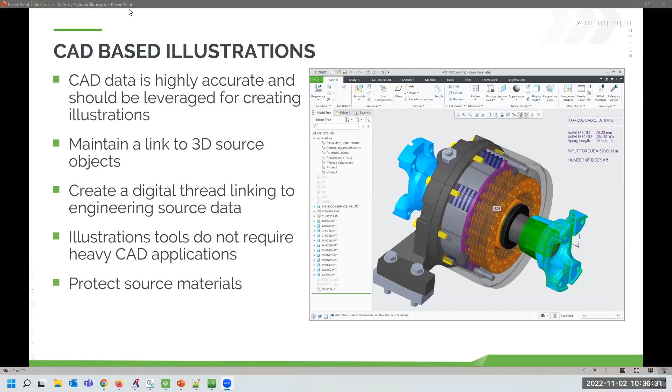The two PTC tools we have that accomplish these goals are Arbortext IsoDraw, which, as the name implies, is an isometric drawing tool with a full suite of electronic drawing capabilities for draw-from-scratch examples. I have this sample file—let's take a look at it. This was actually drawn using the tools in IsoDraw.

A unique capability of IsoDraw is that it can still bring in a 3D source CAD object. You would then flatten it into 2D and work with the additional drawing tools. So this is a long-standing tool—an excellent tool set that has seen quite a lot of use and continues to do so.

A newer illustration tool in the PTC portfolio is Creo Illustrate, intended as a three-dimensional environment for working with 3D source materials. In Creo Illustrate, you would start with a complete CAD model and work with it in an interactive 3D space, meaning you can also output three-dimensional viewables that could be used in things like augmented reality, or even creating an animation or a 3D viewable you might interact with on a screen—all possibilities using Creo Illustrate.

Between the two tools, they seem like they might overlap, and they do in what they can output for their end results, but fundamentally they really have two different use cases. IsoDraw has that full suite of 2D drawing tools and is limited to only two-dimensional output—at its core, it's a 2D drawing tool. Creo Illustrate can also output two-dimensional graphics, but it is more closely tied to that CAD-based source.

In Creo Illustrate, I can only consume 3D geometry—I cannot author 3D geometry. It's intended as being downstream from the authoring perspective of the 3D. I'm leveraging that data, but I can still do functions like, in this sample here, create my exploded view.

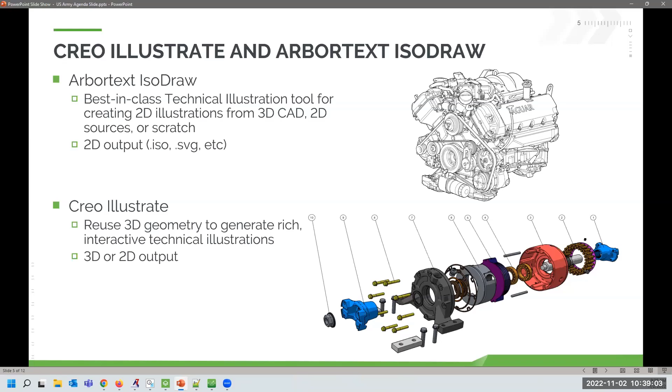So the top graphic is created in IsoDraw, the bottom graphic was created in Creo Illustrate. They can overlap in their outputs, but their use cases might be different depending on whether you need to open up existing 2D artwork and make changes—IsoDraw would be a great tool set—or if you have 3D CAD, Creo Illustrate is a really friendly program to use.

A couple points here, and I'll show a little bit around this: both of these tools are fully integrated within Windchill, meaning I can control all of the sources of my illustrations and the outputs of where my illustrations might be used, whether that's in, say, XML documentation or something like a parts catalog view that Ryan will show. I have controllability over all of those contexts.

I like to call them control points—you have control points from the downstream perspective of the illustrator, or even who might be downstream from there, say the parts catalog using an illustration, all the way back through to the CAD. So as changes are made, we are doing check-ins and check-outs, and everything is version controlled, stored in Windchill. We will see this type of interaction in Ryan's demonstration.

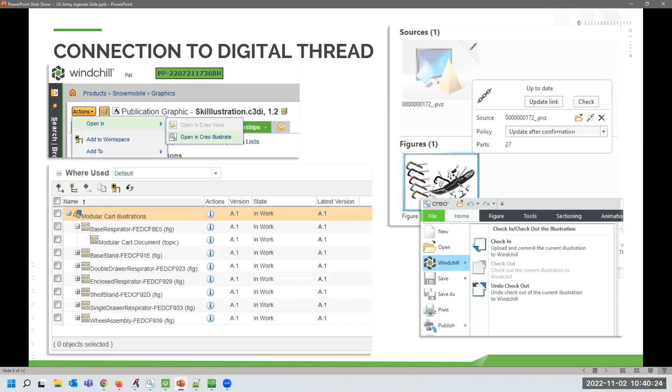So what I wanted to focus on was just an introduction to the tools themselves. But if you have questions here, please feel free to ask. This is a topic of interest that we could certainly schedule another session on and spend more time. I will end my presentation with the file formats that can go into and out of the illustration tools. If you would like these slides, please let us know and we'd be happy to provide them.

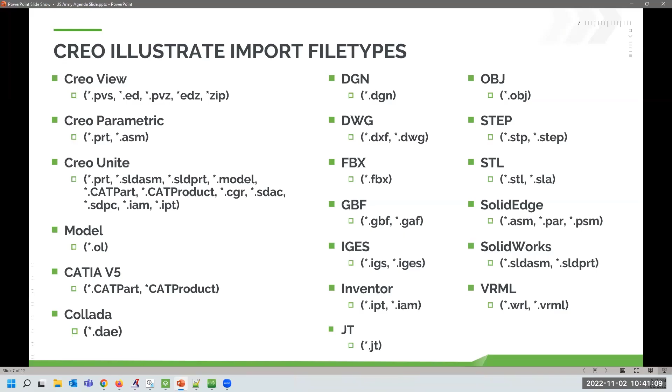For Creo Illustrate, it is able to import 3D geometry, so all of these formats here are 3D formats. Some of the PTC flavors, for instance the Creo View formats—we also have adapters that can go from formats not on the list to PVZ, which can be read into Creo Illustrate. So you could think of that being extended, but these are all the direct file types that can be read directly into Creo Illustrate, and links can be maintained to them, so if they're updated in the future, you can update them appropriately in Creo Illustrate.

On the way out of Creo Illustrate for publishing, we can publish to 3D formats, 2D vector artwork, image formats, movie formats, as well as capture procedural information for Vuforia. I'll do a quick example for what bringing in an illustration into Vuforia could look like, but there is a streamlined process for doing that on the Creo Illustrate export.

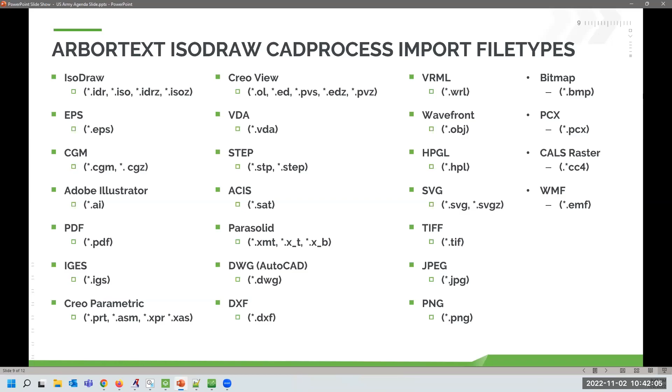For IsoDraw, IsoDraw can bring in 3D formats, 2D vector, and 2D raster. So that's what you're seeing here on this list. That is a lot of different file types. It's the only program I'm aware of that can do that. But some of the big ones would be things like CGM graphics and other existing 2D artwork we can open and work with inside of IsoDraw.

On the output of IsoDraw, it would only be the 2D formats, whether 2D vector or 2D raster. These are controllable through ISO profiles, or if you have a specific format, say for CGM for deliverables, IsoDraw has a large library of capabilities there.

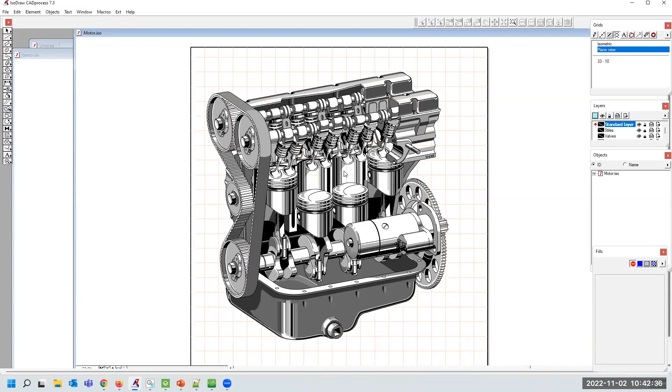So I'll start with IsoDraw and give a little tour here. This is that sample file I was mentioning that was actually hand drawn here in IsoDraw. We can see here that I have my different layers and authoring tools that I can have.

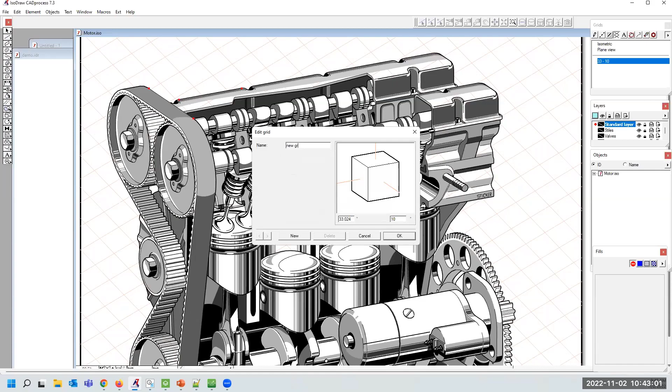The idea here is also that if I come in and let's say I grab a couple lines, we can make a new grid that will actually - let me make a new name. We can put this into a perspective that allows me to draw in the orientation of this artwork. So there's also tools for transforming from one perspective to the other, but you'll notice my camera is going to stay fixed to my workpiece.

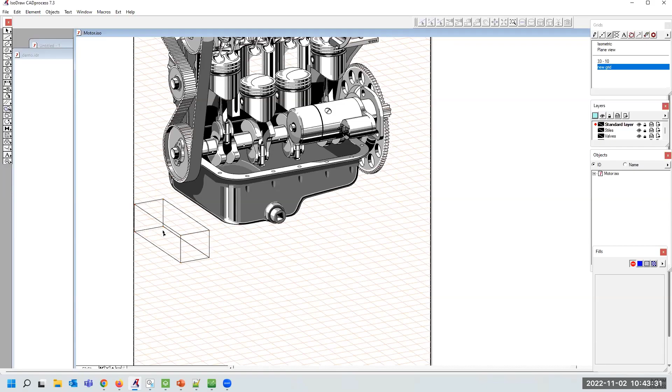Now that I've aligned my grid, I could come in and draw in the same perspective that I'm seeing here. So for instance, if I wanted to extend out this into a 3D shape, I can come in and do that. And then I would have the abilities to come in and trim up my lines, for instance, work with my fills and draw shapes and lines and other tools.

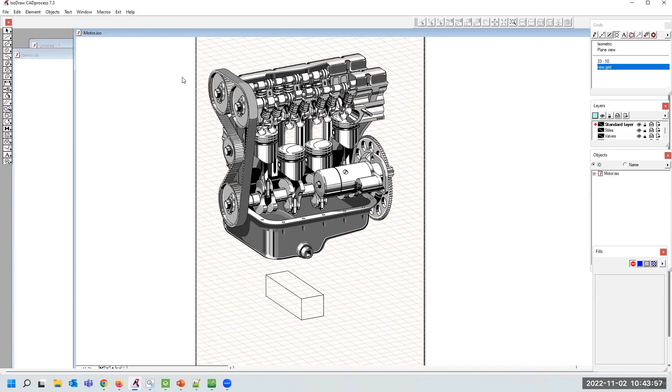So this is, again, just drawing type of functionality that I have here in IsoDraw. It's a really nice set of tools. There's perspective tools for laying out. Things like threads can easily be drawn, parallel lines, those types of things.

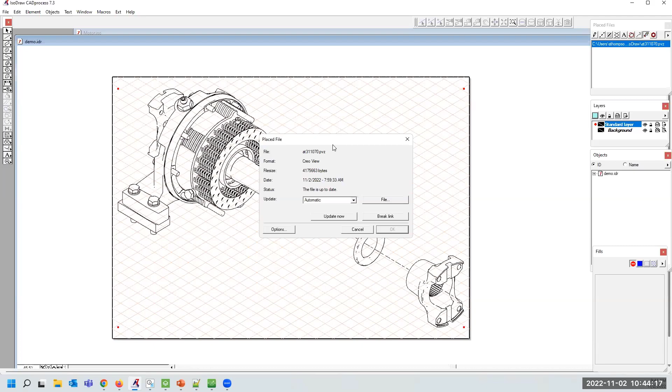A really cool capability is I can also have my illustration be linked to a source 3D geometry. So right here, this is a .pvz file. That's PTC's lightweight 3D format, the Creo View format. And right now it is looking for an update to the 3D data for my 2D artwork.

In fact, if I want to, I can actually bring this into the 3D. And when I do this, you'll notice my 2D tools are grayed out, and that's because I'm in the 3D edit mode. But I can grab on this part. I could change the color, for instance, if I wanted to. I can turn the parts on or off like I could with a layer.

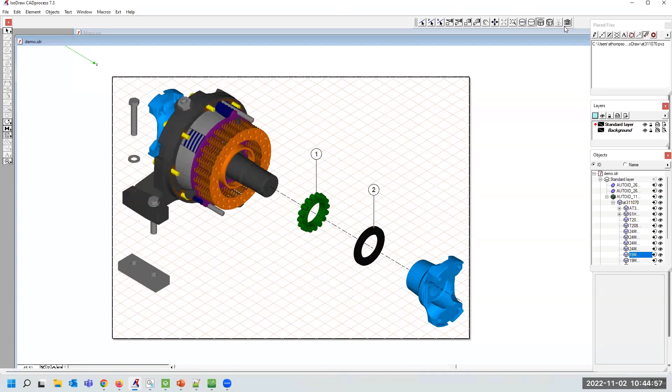But let's say I wanted to do some more exploding of these parts. I can grab them, we can do the explosion. And then I can convert this back into 2D artwork to use the rest of my drawing tools. In that process, I can choose how I would like it to draw the lines and convert the 3D into the 2D.

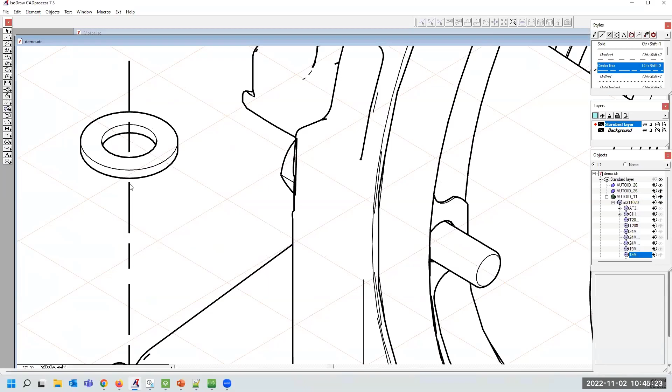Once back in the 2D perspective, I could then use the drawing tools here in IsoDraw. So in this tool, for instance, if I wanted to draw an explode line, I would draw the line, and then I can come in and we could do some trimming, for instance, to make that appear like it is going through the 3D geometry. So now I'm back in my line drawing mode, which would allow me to come in and clean that up.

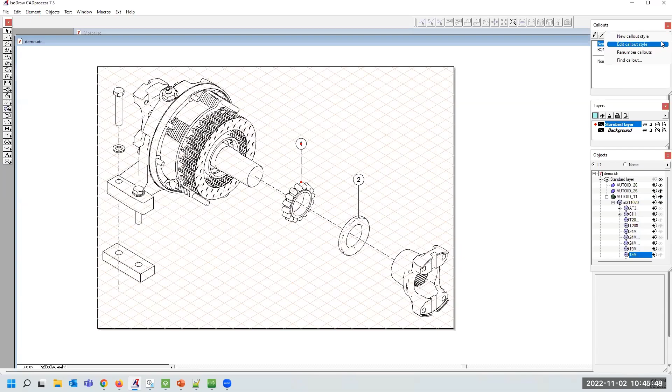So that's kind of a very quick tour here through IsoDraw. There are a ton of capabilities. Things like my balloons here are all controllable through editing. Text is a huge component here. I can create hotspot regions that would be selectable, meaning the text from this number 1 could highlight on my pick list in my graphic renderer. But here in IsoDraw, it gives me all of those capabilities for authoring.

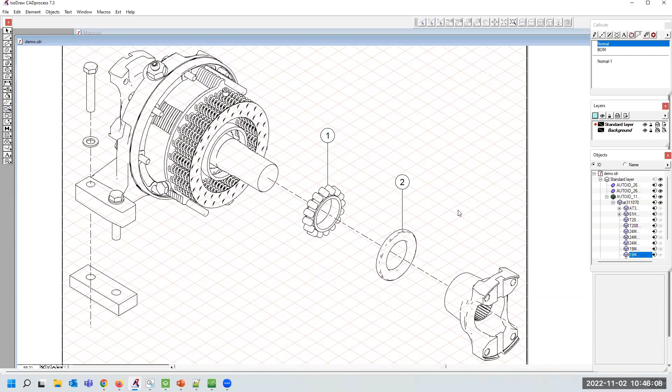Moving over to Creo Illustrate, so here is actually the same source geometry. This is the same parking brake assembly, but now I'm looking at this in Creo Illustrate. So I'm in the 3-dimensional environment working with the 3D model. And in Creo Illustrate, I have the idea of creating multiple figures or individual illustrations. The Creo Illustrate project file itself would be this .c3di file.

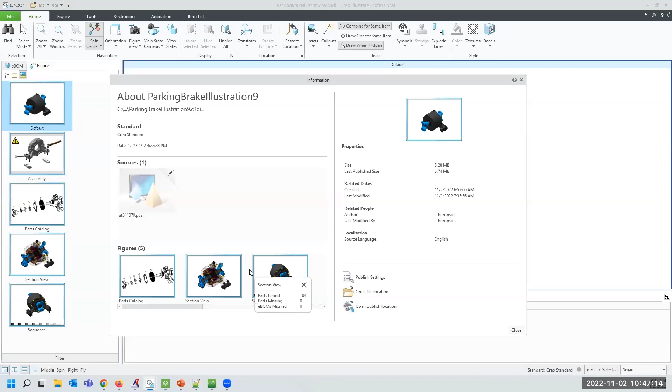It would contain, or can contain, as many number of figures or illustrations as you would like. It also, just like in IsoDraw, would contain the link to update the source geometry, and I can bring in multiple models in both tools. So if I wanted to bring in tooling or fixtures or even just other 3D reference geometry, you'll see in an example I have some tools, but you can load in other objects here. Based on that, I can have any number of figures that could be created, and the figures might be things like an animation, which I'll show here in just a second.

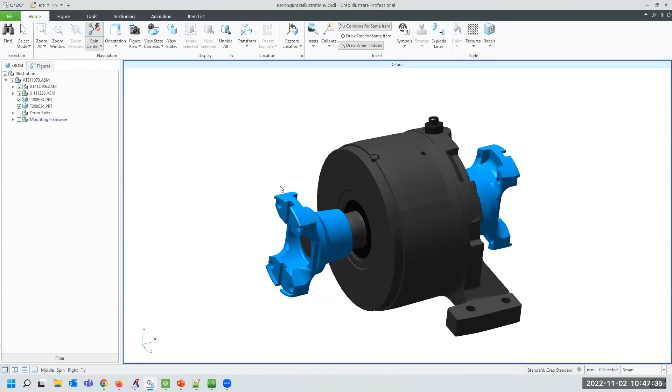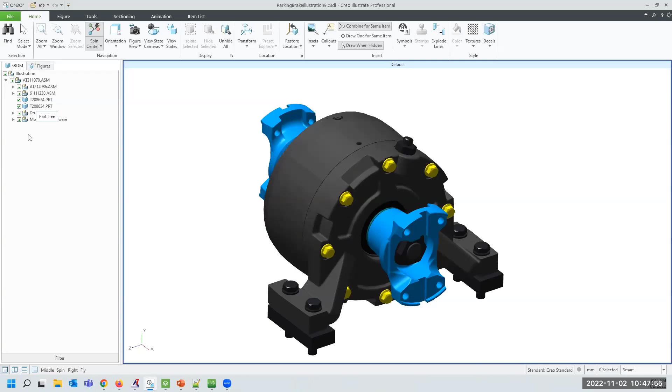So in Creo Illustrate, we can work with the structure of these parts, and I can actually restructure them. I made a couple assemblies here for myself to easily turn on and off some of the hardware and bolts, and make changes here. These changes are not being propagated to the CAD in any way, they're just changes in my illustration bill of material. But that's really handy, especially if you're working with a large assembly, or you might not be familiar with the engineering part names.

I can have access to rearrange that for myself as an illustrator. Speaking of the 3D information, all of the CAD attributes can become available here in Creo Illustrate. We can create parametric annotations that would look at this data. Say if I wanted a field for the material, if I wanted to have a callout, pull that off, or a torque value, all of that can come from the source 3D geometry.

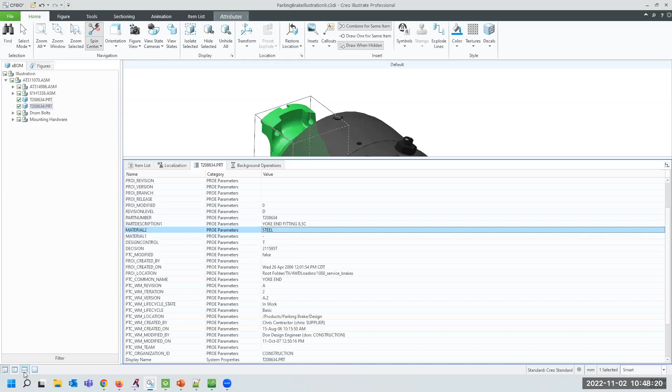The position or home position of all of these parts is remembered and also editable here in Creo Illustrate. So if I wanted to start making my exploded view, I can pull my parts out, and these parts are going to remember where they live. So I can tell it to go back to its home.

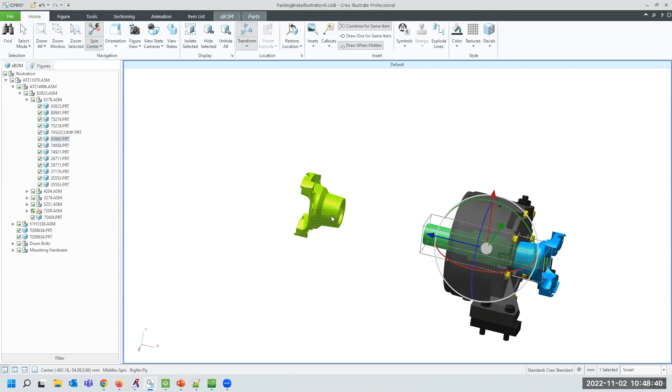Doing something like creating an explode line here is much simpler because it will actually draw that in the 3D. And if I wanted to grab, let's say, the seal and bring that out as well, that's going to be within the 3D bounds of that part. So I'm actually creating content within the 3D world. This is a friendly tool to use, has lots of nice user features.

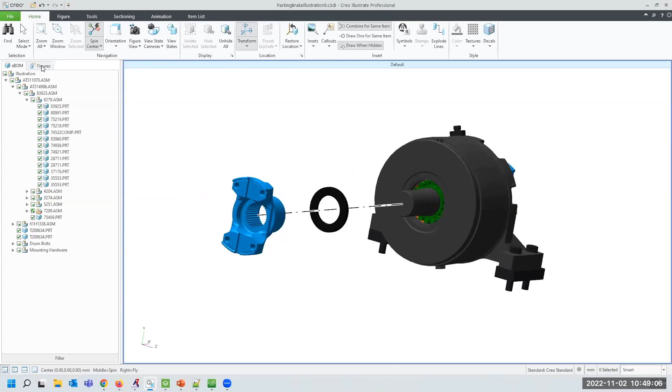Some examples we can do here in Creo Illustrate. Here is that example I was saying for, in this case, it's formatted for a page. I have a page size specified in case I'd like to output this in 2D and have it be controlled. But a couple examples here would be...

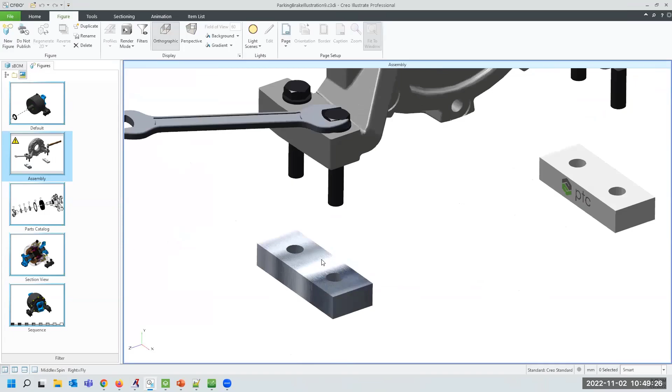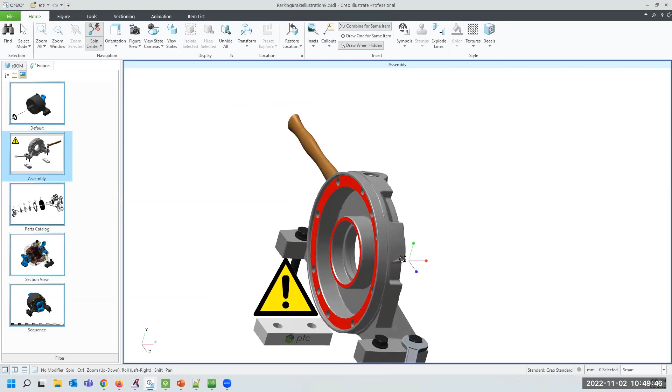We can have textures applied to parts. The colors of the parts are certainly editable as well. On the back face, let's say if we wanted to select on this face and change the color of that, I can quickly and easily do that. And change maybe that's reference geometry or something that I'd like to point out within my animation.

Here's an example of some of the tool library that is configurable here in Creo Illustrate. I have a logo applied to the 3D surface of the part. So some visual aspects here. One note, Creo Illustrate is not intended as a highly realistic rendering engine. We do have that as part of Creo Parametric. This, as the name implies, is for illustration purposes.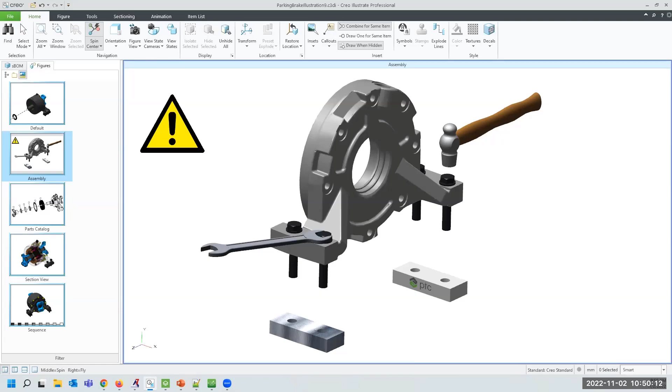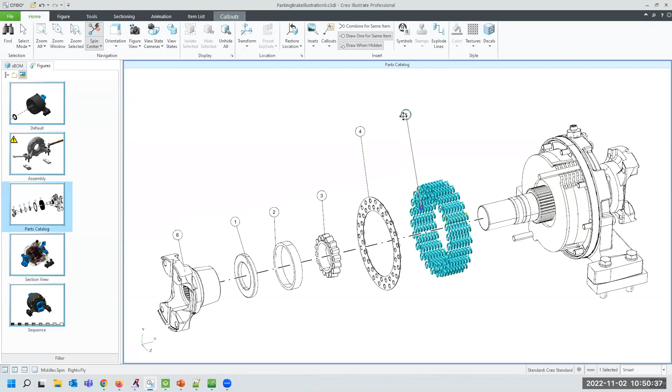A really common use case would be creating your parts catalog view. This is just a hidden line removed view, but you can see here, I'm still in the 3D geometry. So this might be something that I may export for 2D artwork, but I can have my callouts attached to the 3D geometry of these parts. So in my part viewer, I can select on the item and it would highlight, or the callout and it will highlight. And it's actually building an interactive list here in Creo Illustrate.

And in Ryan's portion, he'll show how we can control this list from the Windchill side and push the information into Creo Illustrate. But I can have this list, I could come into this list, and if I wanted to add that material value or torque spec or whatever other information might be at this part attribute level, I can have that populate here in Creo Illustrate as well.

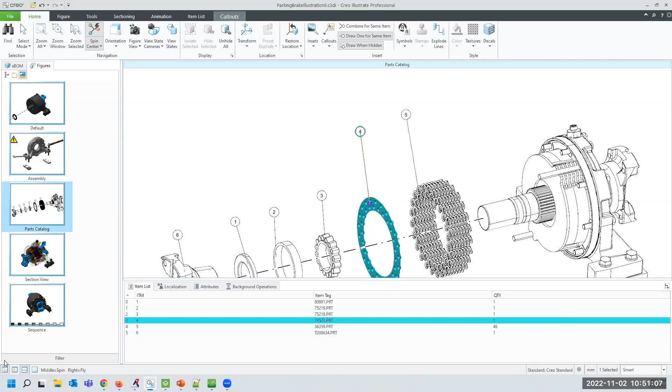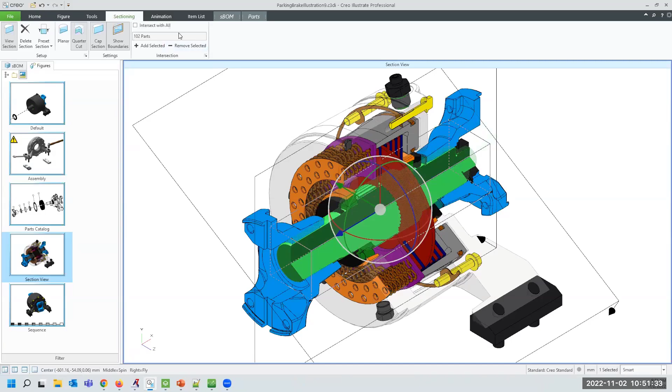A couple more examples. Doing something like a section view is really, really easy to do. I can simply say that I want a section view and then dynamically move it through the model. And in this case here, I'm having it intersect with, well, we can add everything to that, or I could remove items as I see fit for whatever I'm trying to detail or show. So again, just a friendly program to be able to use and come in. And of course, this can be exported in a 3D configuration so the end user can actually interact with and see the model in a 3D viewer as well.

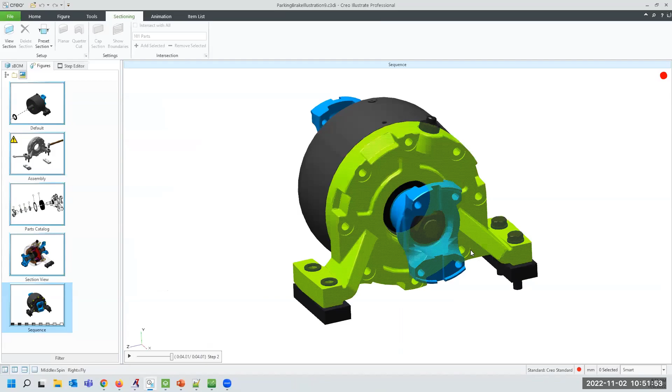One really powerful capability of Creo Illustrate is I can animate parts, and I can do that in what's called a sequence here in Creo Illustrate. This gives me stepped animations that build upon each other.

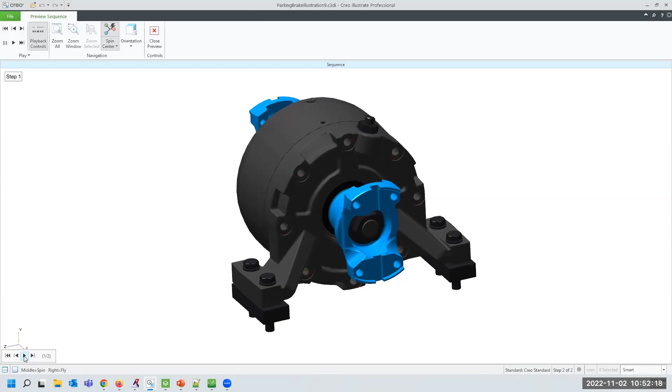So if we look at this in the renderer, we'll play through it. It's pretty simple, right? I'm showing some color changes, some parts unscrewing. So this could be a disassembly procedure. But the cool thing is that I've captured that in 3D space.

So if I want to play this back in whatever orientation, that can be remembered and then played back. That's the idea for delivering this to, say, augmented viewing, where it renders in 3D space and your camera position or eyewear position would then play that back. We can also capture the camera position in Creo Illustrate if we wanted to output a movie file as well.

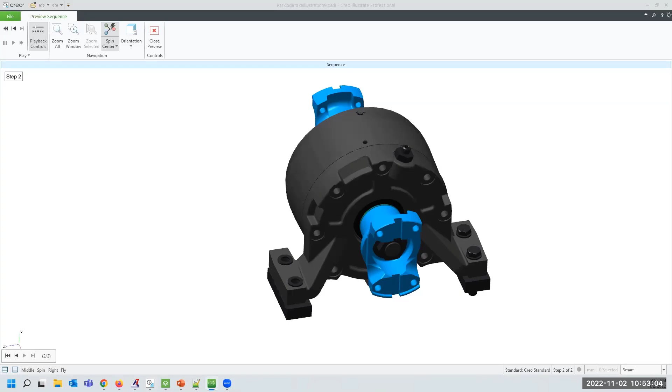So that's a quick view at some of the tools themselves. In terms of some examples for how these might be used, I have a couple. One is within an XML document, and this is just a quick example of showing multiple figures within a document.

All of these are going to be based on the same illustration file. You can see here this 16713 that contains all of these different graphics, and they can be interactive in 3D in the XML. This is a topic and a DITA topic, with tag types, but all of this is remembered, and the figures where these are used, the where-used nature is known when we store this inside of Windchill.

So we can have reusable illustrations. The source of those files from the CAD perspective is controllable, and even referencing them here in the XML, I might reference the 3D. So if this is published to a 3D environment, it could be interactive. If it's going to something like a PDF, it could be converted into an image during the publishing process as well.

So an example here would be this illustration file itself in Windchill, and we are looking at the upside-down where-used tree. I can see that it's used in each one of these figures and the location that figure is being used. So just to point out, all of this information is being stored.

I can see the synchronized versions, the latest versions, and changes made to this, and of course then I can see everywhere changing this illustration might affect.

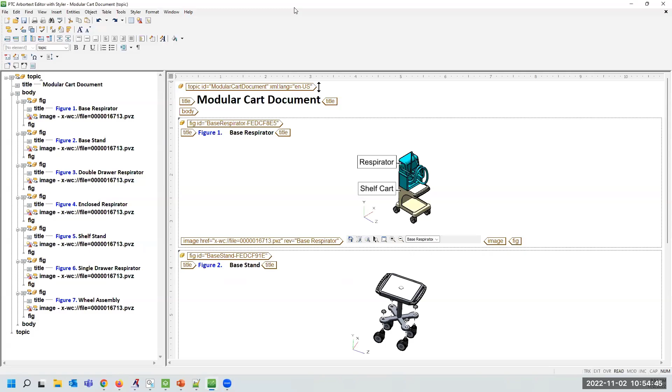My last example here would be going in and just a really simple example for building out an experience in Vuforia Studio. So this would be an augmented reality experience. Very simply, I can come in and upload my output from my illustration that we were just looking at. So here we now have my model in the 3D space.

Let's go ahead and I'll choose that sequence that I made. Then on my 2D overlay for my controls, let me make a button, and we'll call this the play button. Here in Vuforia, it's very simple to come in and interact things. So I'm dragging this onto the 3D model and saying that I want that play button to do a play function for that model.

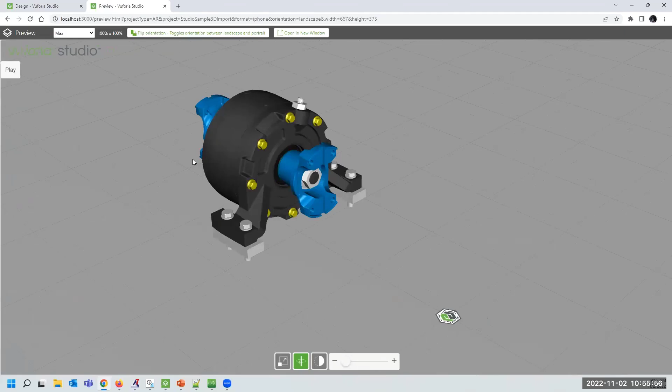If we do a preview here, so I've taken the output of Creo Illustrate and put it into an experience for viewing. So if we go and preview this, now I'm in the 3D world here, and in the real world, if I were to publish this, I could look at it on my iPad and I would be walking around the 3D space where this model is being loaded. But here's my little play button I created.

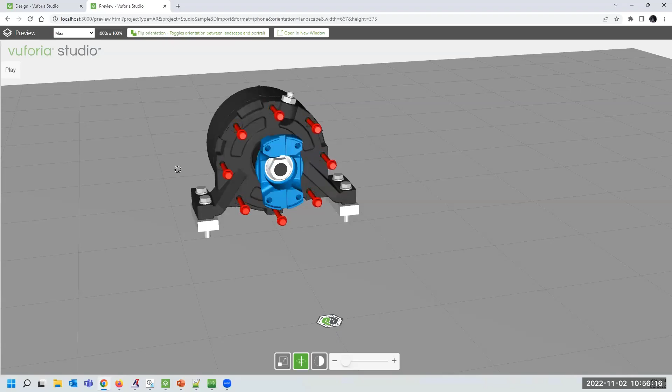And if I hit play on that, we'll see my animation and how I created that, right? So here's my bolts unscrewing, and then it will pause, and then I can come back and go on to my next step.

The really handy thing with these sequences is, let's say I forgot to do something in Creo Illustrate on the authoring side, I can come back and say, actually in step 1 at the very end, let's say we wanted maybe this part to change color. Well, I can come in and say let's do a color change, and let's have this turn, let's say yellow.

You'll notice here when I hit OK, it will propagate to all of my subsequent steps. So these are going to re-render. And then you can see here at the start of step 2, that's going to be yellow. It added to my little timeline here a color change event for this part.

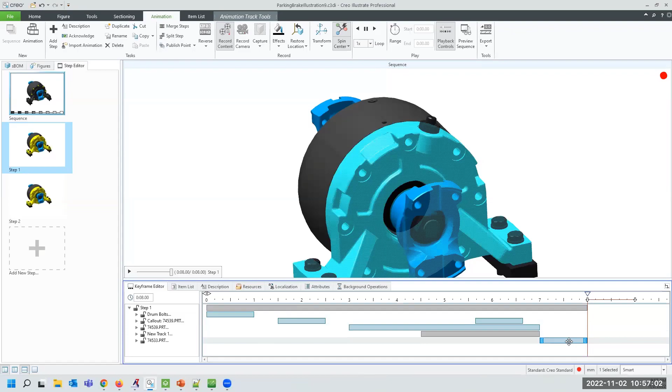So actually, if I wanted it to turn yellow in the middle of my animation, I can do that. And then as we play back, it will now turn yellow, along with my other animation. And then here in step 2, it will remain yellow. So this is really nice to use.

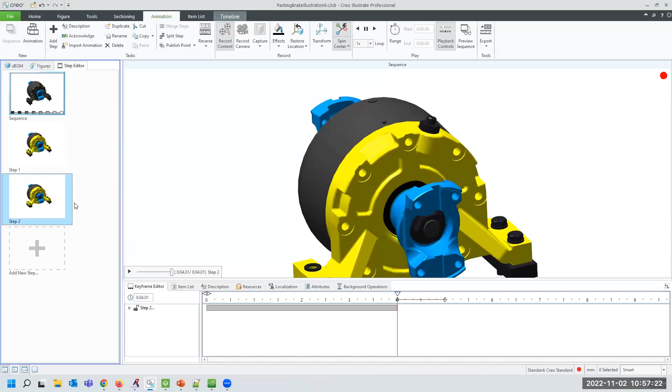I can rearrange these steps. If I forgot to do something or I need to add to it in the future, it's really handy to be able to come in and work with that in a sequential timeline.

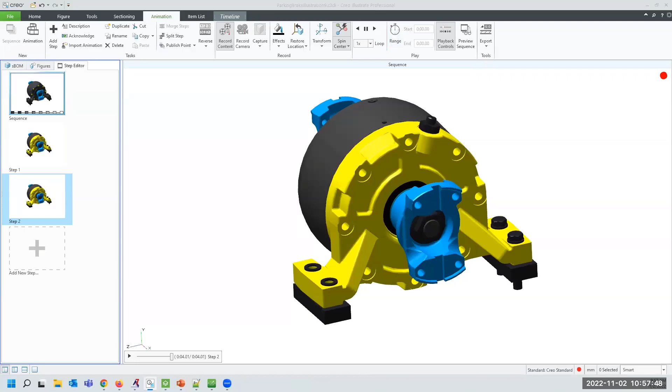So what I'll be demonstrating today is generating similar illustrations to what Scott just demonstrated, but doing that directly from a parts list in Windchill. I should also mention that just for the sake of time, I did pre-record this demo so there was no dead air, but let me go ahead and start this.

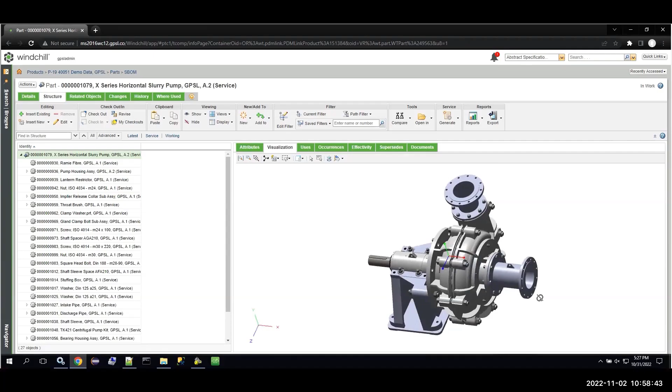So what we're looking at here is a parts list in Windchill. The first thing I'll show you is that this parts list is associated with a bill of material. In this case, it's a service bill of material. But a parts list could easily be associated with an engineering bill of material, logistics bill of material, any type of bill of material, and those bills of material can all be derived from one another—upstream, downstream bills of material.

So you can see that bill of material had some CAD data associated with it. Now going back to our parts list, all of the parts that we pulled in from that bill of material, you can see them in our parts list here, and each of those have an item number assigned to them automatically.

Now if we go and generate an illustration from our parts list, you can see the template we've selected is Creo Illustrate, so it will generate that C3DI file that Scott was just showing you in Creo Illustrate directly off of our parts list. I'll go ahead and give that C3DI file a name and click Finish. This can take several minutes in the background, but once it's done, it will allow you to open that up within Creo Illustrate directly from Windchill.

You can see on the left in our parts list, we also have that C3DI associated with our parts list structure. So now it's launched Creo Illustrate, and it's prompting us to log into Windchill from Creo Illustrate.

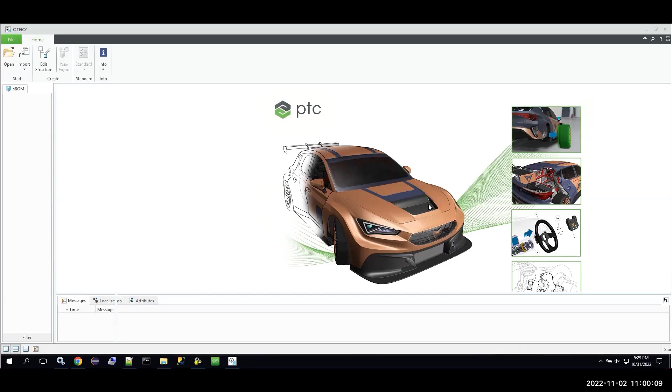From here, once it opens, you can see we have the basis of our illustration, so we can go ahead and start building out our figures. First thing I'll do is create a new figure. Like Scott mentioned, you can have multiple figures within the same C3DI file.

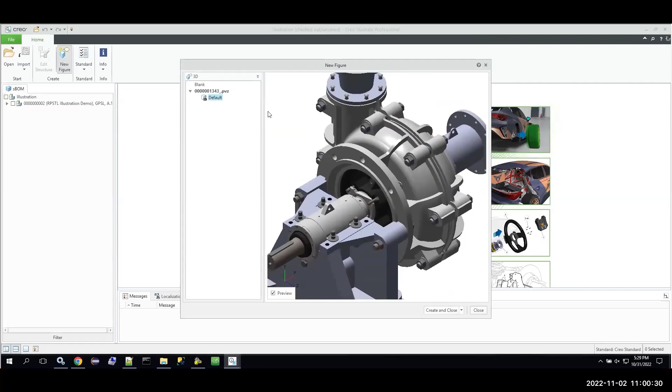So if you have a parts list or an RPSTL that has multiple sheets associated with it, you can generate all of those sheets off of the same C3DI file and then export them to whichever file format you want, and then associate those back to the parts list. I'll demonstrate that a little bit later.

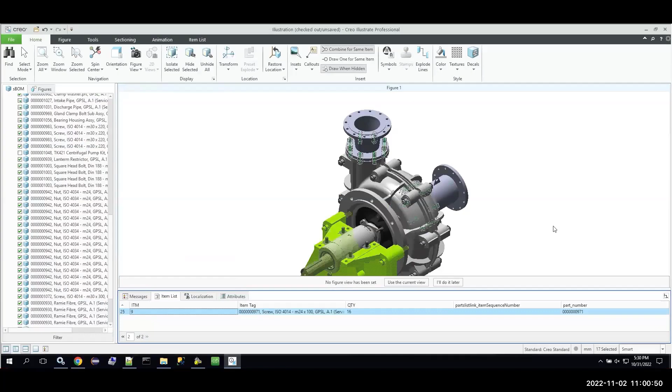So once I've got my illustration opened up in Creo Illustrate, I can do things like reorient it—a lot of the things that Scott demonstrated previously. So I'll go ahead and reposition it.

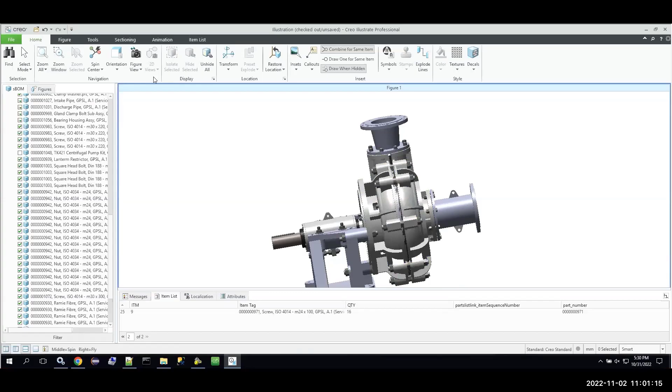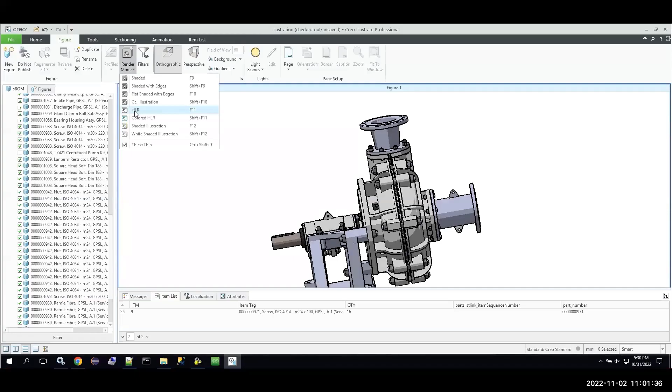You can also do things like, if we go over to the figure tab, change render mode so we can have it display differently. It's the same 3D illustration, just rendering it differently. We can have it display as line art—several different render modes.

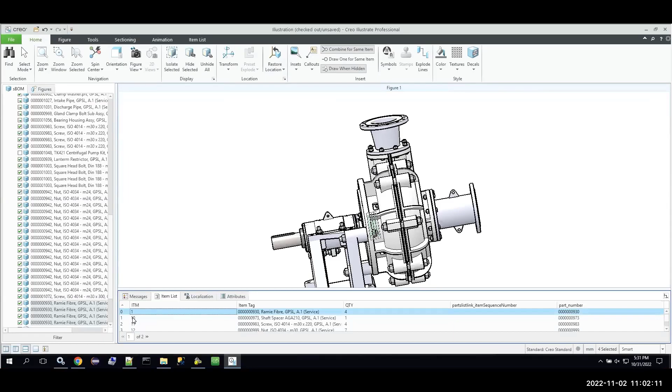From here, we can go ahead and add our callouts back in. There's a number of different callouts to choose from. These callouts, the numbers are all derived from the parts list that we generated on the Windchill side. So again, I'm adding the callouts back in—those numbers came directly from the parts list.

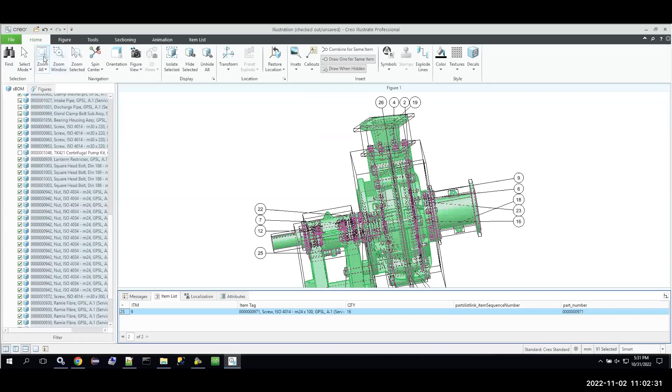Once I've added my callouts, I can reposition those. So I can move my callouts around.

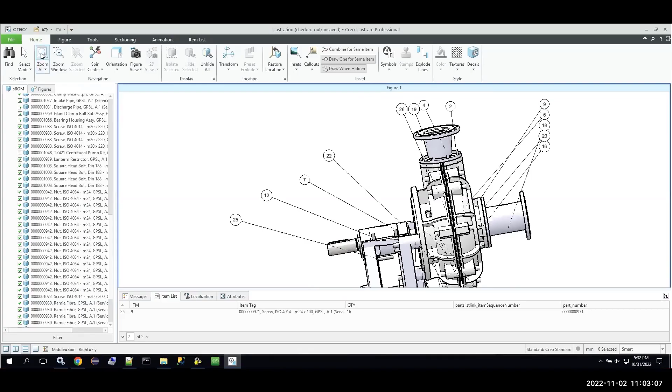And then from here, I can start exploding out different parts. So I'll go ahead and create my exploded view.

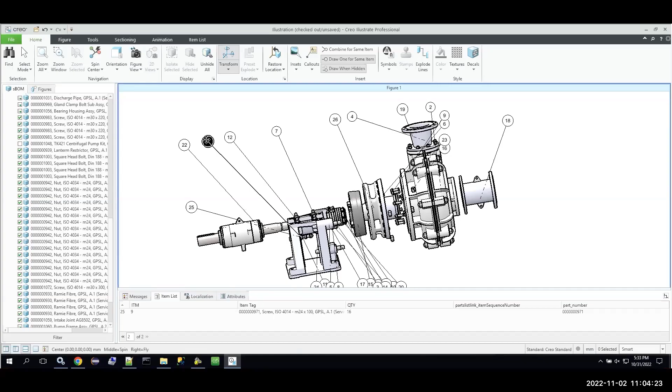All right, and then once I'm done with that, I'll just go ahead and clean out my callouts a little bit more, finish repositioning them. Once I've finished exploding my parts, created or moved my callouts, and I'm happy with my illustration...

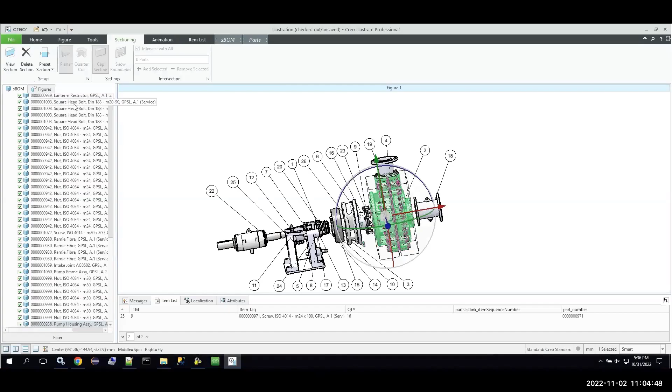At this point, I can go ahead and do other things like creating sections. But once I'm happy with the illustration, I can go ahead and save that, and then I'll go ahead and check it back into Windchill.

And then once it's done uploading, I can close it out from Creo Illustrate.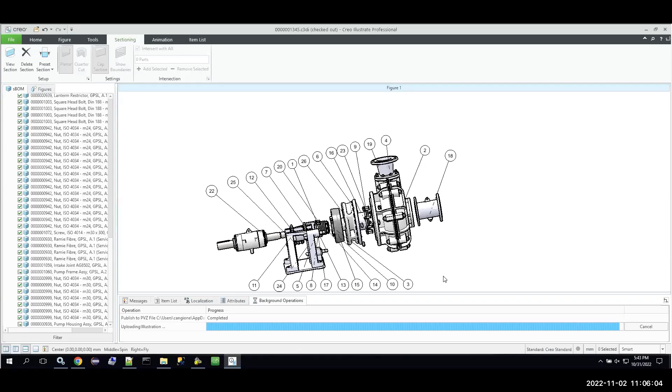So now if I go back to my parts list, you can see that the C3DI file is associated with my parts list. From here, if I start renumbering all of my items, starting from the 11 o'clock position, I can go back and renumber each of those items.

In addition to changing the item number, you can also modify other attributes on the parts list items, such as serviceability or whether or not the item is illustrated. So for example, if you want an item to not display the callout, you could flag that as non-serviceable or illustrated equals no. That will impact how it displays on the Creo Illustrate side.

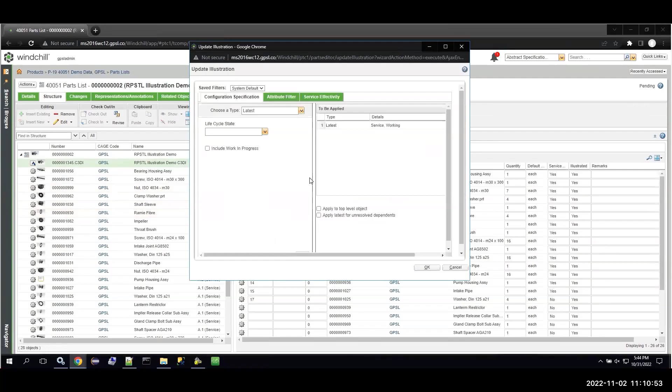Now that our parts list has been updated and the item numbers have been changed, we can actually update our C3DI file. So if I go to the C3DI from the parts list and select Update Illustration, it's going to take that same C3DI file and update those item numbers. It'll maintain the same positioning and everything we've already done, but it's now going back and updating those item numbers.

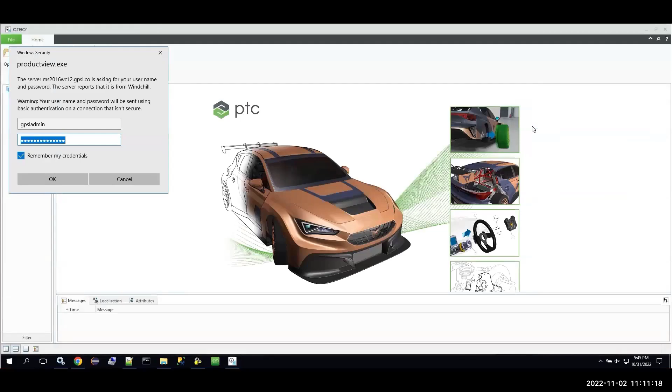So now if I open the C3DI file again in Creo Illustrate, you can see it's telling us that the PVZ was updated, and now our illustration has also been updated. It's renumbered all of those callouts starting from the 11 o'clock position.

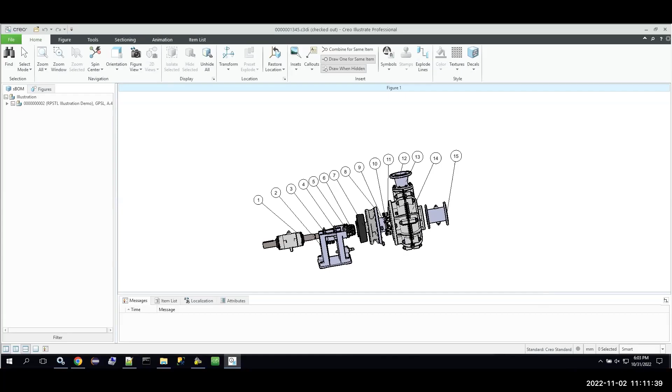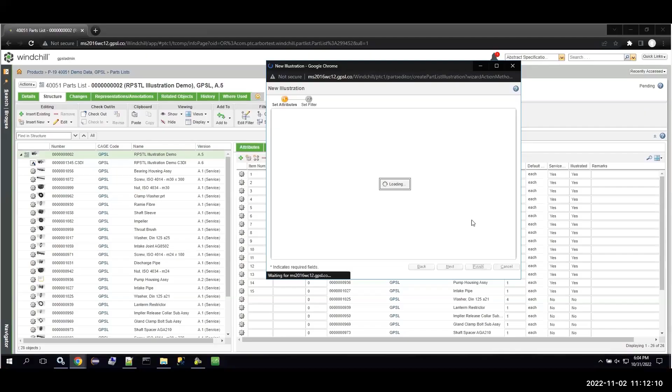Another thing we can do from the parts list itself is generate an IsoDraw illustration. So from the same parts list, we can create our IsoDraw file. Go ahead and give that a name. And now this time it's prompting us to open it up from Windchill within IsoDraw.

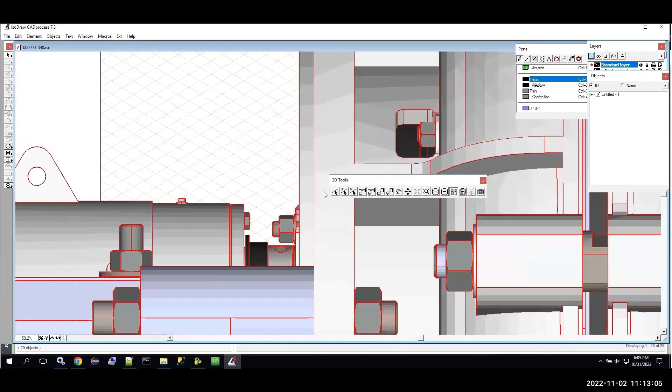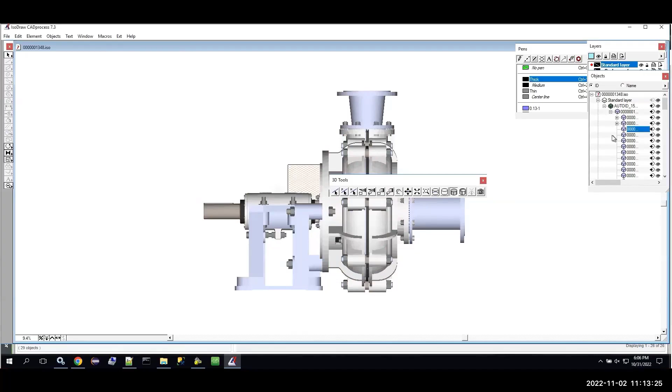And so now you can see we have the basis for our IsoDraw illustration using that same CAD visualization information. So that would be creating an IsoDraw illustration from the parts list.

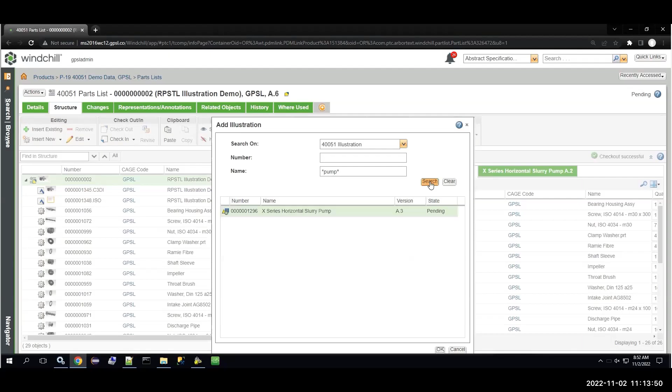The final thing we can do is associate an illustration created outside of Creo Illustrate, not from the parts list directly. So let's say we have our own 2D illustration sitting out there that we want to associate with the parts list. We can search for that within Windchill, and then we can associate that illustration as well.

So once I've associated my illustration, I'll go ahead and check that back in.

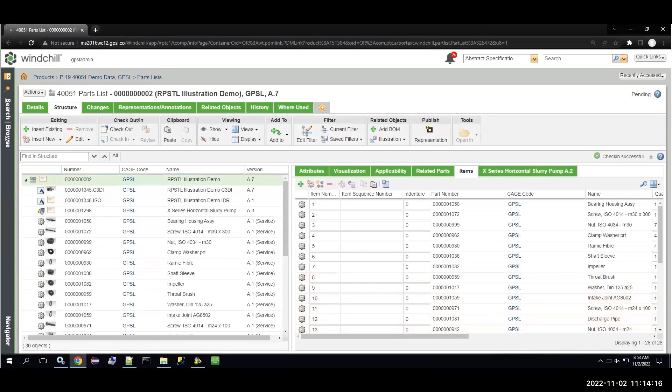And then the final thing I'll demonstrate isn't necessarily related to the illustrations, but it does demonstrate what happens if there's an upstream change to the bill of material that the parts list was generated off of.

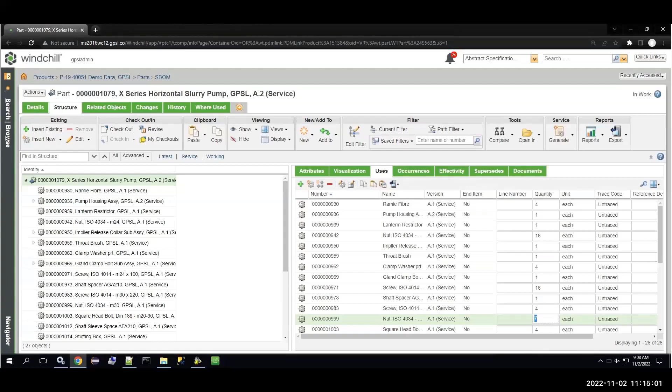So going back to my service bill of material that I used to generate my parts list, if there are any upstream changes to this bill of material, for example, if I change a quantity on one of the items, say from 7 to 8, I'll go ahead and check my bill of material back in.

Now, if I go back to my parts list, you can see that Windchill has flagged this parts list as needing an update. It gives me the option to either remove the update required flag so I can ignore that change, or I can update the parts list.

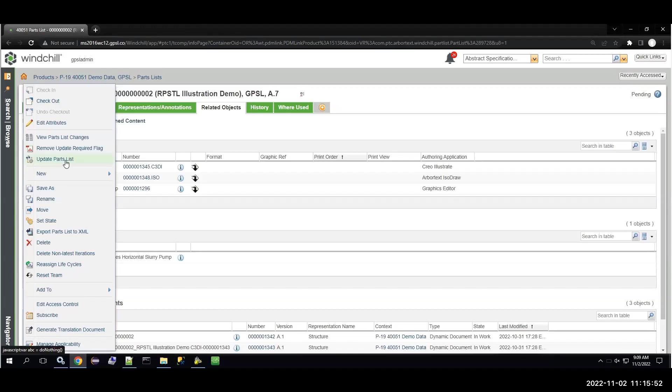That would bring the parts list in alignment with the service bill of material. So that's generating illustrations off of a parts list in Windchill.